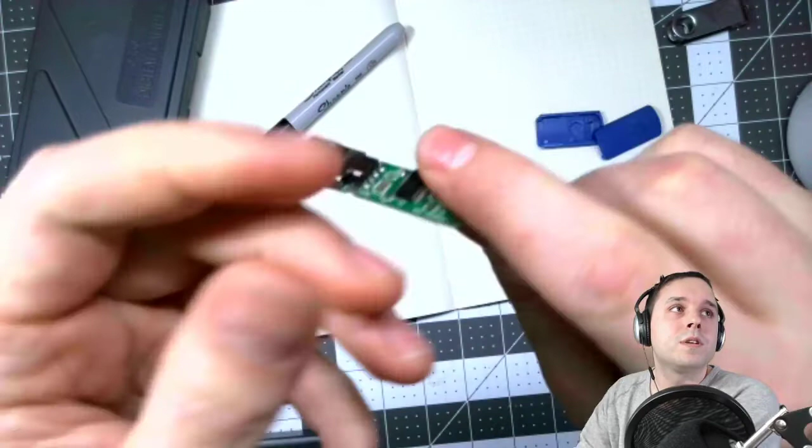Nope. Alright, let's see. Got desk. Let's see how fast I can get this done. Got my USB. We're going to crack this one open. Same old USB that y'all have previously. See if I can get that in focus at all. And what I need to do, as the police go by outside, is I need to just get a basic outline of this thing so I can start to model it.

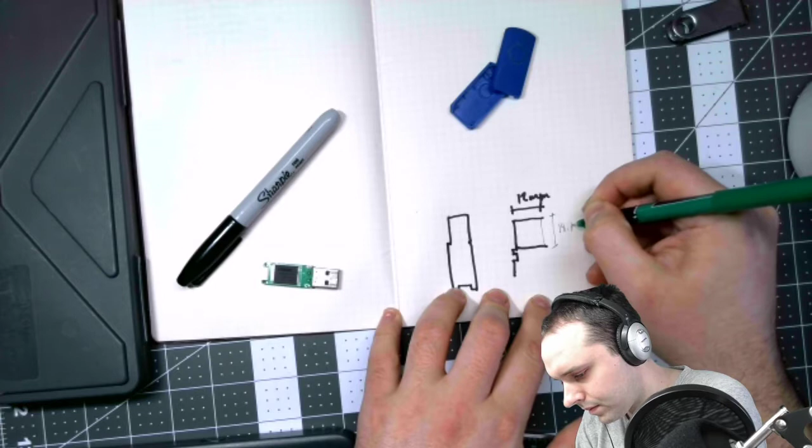And when I look at this, there's going to be a little tiny lip there. I can barely use that. I should probably mark these with Sharpie just so y'all can actually see them. Alright, just from loads of experience, that's going to be 12 millimeter. Turn this guy on, and we got 14.79, so 14.78. Or 14.8. Oops. This guy right here, I can get tiny lip is 1 millimeter.

This right here, let's assume that's 1.5. So all I'm trying to do right now is get all the critical measurements of my USB so I can take a sketch and put it into Onshape. So this dimension there, let's just assume if this was a rectangle and didn't have a little cutout on the edge of the board, 26.35. Make it 26.4.

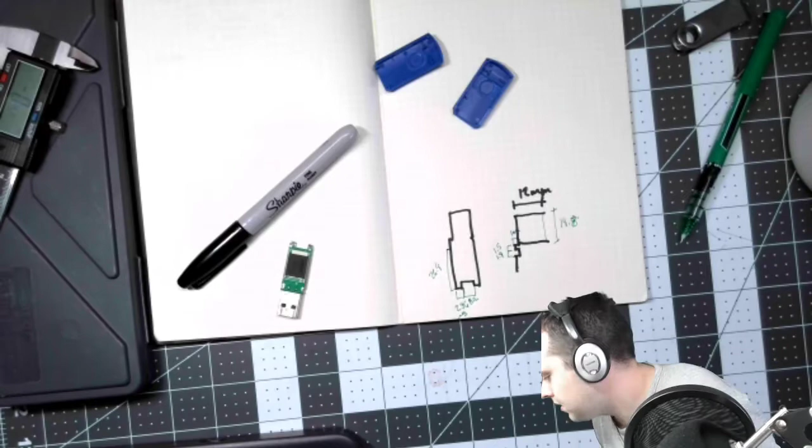2.96 for the little nubbin on the end. So let's just round up to 3 maybe. And then this gap back here is 8.2. This may be boring to some of you because you've already gotten this far through the project and done all the sketch part, but I'm just doing this because I need to do it, and it'll be nice to have on a video in the future.

So if we look at this, we'll make it nice and big now. And I don't think I can get my camera any closer. 12 millimeter, 14.9. That's going to be 1 millimeter. 1.5 millimeter.

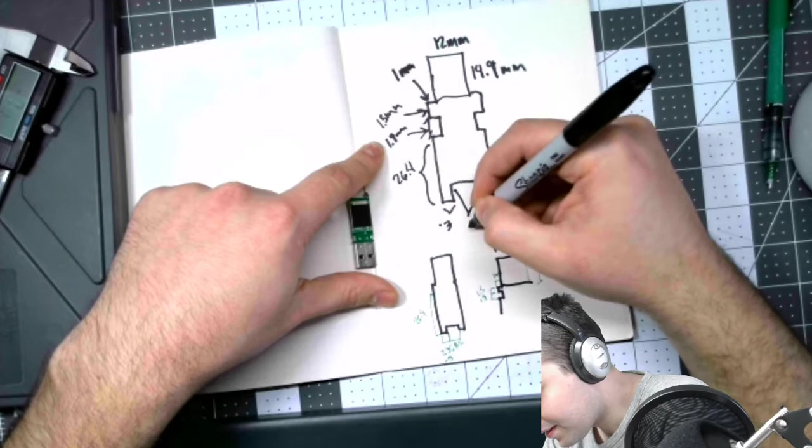Is Haiku even working still? What's it saying? I can't look at it right now. No, I'm just doing this drawing. Is it giving you like an error? Is it just giving you an error?

If I take the solder out of this connection up here, I can get more depth. I don't think you're going to be able to see that. I can get a little bit more of my notch. But let's just assume that's 0.5 millimeter depth. Okay. So, got a drawing. Hopefully this thing's actually recording. It would be a shame if it was not.

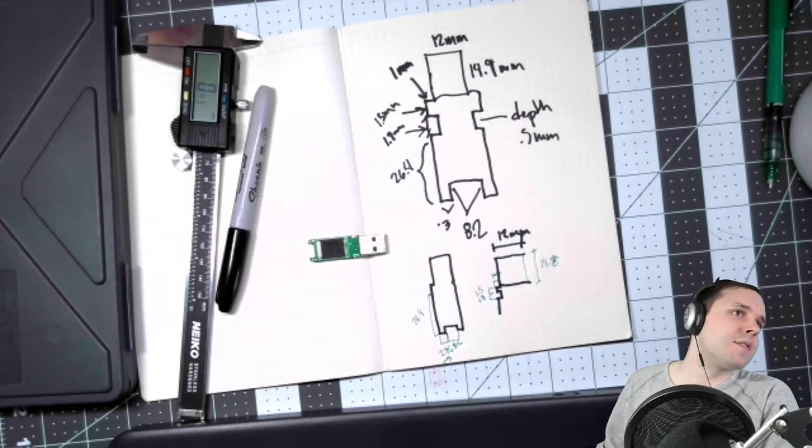So I'm using OBS. I'll bring it in actually so y'all can see it. It's what streamers use. Are you on my stream, Caesar? You should get on it.

Alright, so now what I'm gonna do, hop into Onshape. And we can start a sketch. So what I am going to do, let's start it with a construction line. Doesn't matter where we go. Hit escape. And we'll draw half of this thing. So I should just be able to do boom, boom, boom, boom. Ooh, I don't like that line.

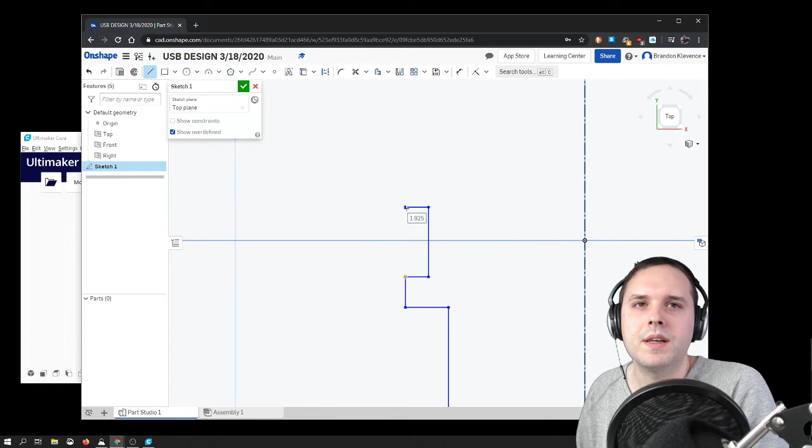That's not a line that I like either. I don't want them to intersect with anything else. This intersection's cool, this projection right here, the yellow line, but with the origin or any of the planes, no bueno. Alright, so got half of my board. It's not perfect, but it'll do for now. We can dimension it. And maybe can I add a video capture? I'll add the document camera.

What I need to do is dimension all these. Should probably get a mouse that doesn't click as much, eh? It's got that width, this depth here, this dimension. Alright. So this is going to be 6 if it lets me do it, but what's it constrained by? Ooh. Alright. Draw a new line here because I don't feel like playing with the constraints.

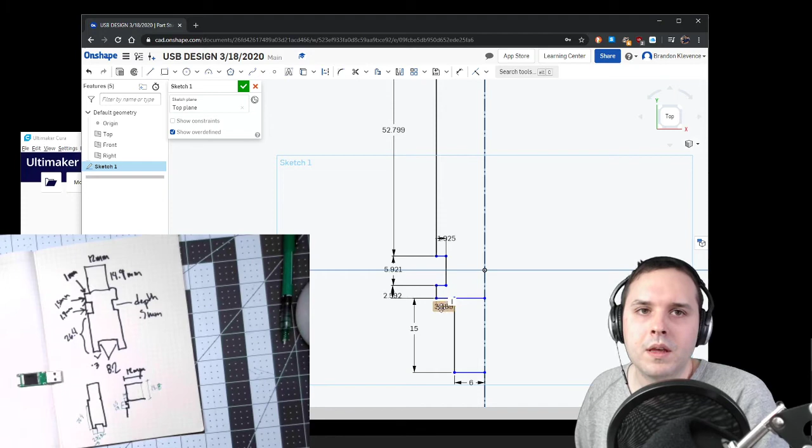Alright, so that's 6. This right here, according to my doc, is 14.9. Let's just make it 15. Let's just round up. This is going to be 1. This right here is 1.5. The notch width is 1.9. Let's just make it 2. Depth, I think I said 0.5. Yes, correct. 26.4 for that. 3? Yeah, 3 for the back notch.

Ooh, and let's just delete these and redraw. Alright, so line, enter, enter, enter. What do you not like? 0.4. That's actually kind of right, so we'll work with it. This needs to be different though. What did I say the depth was? I don't think I measured it. Three.

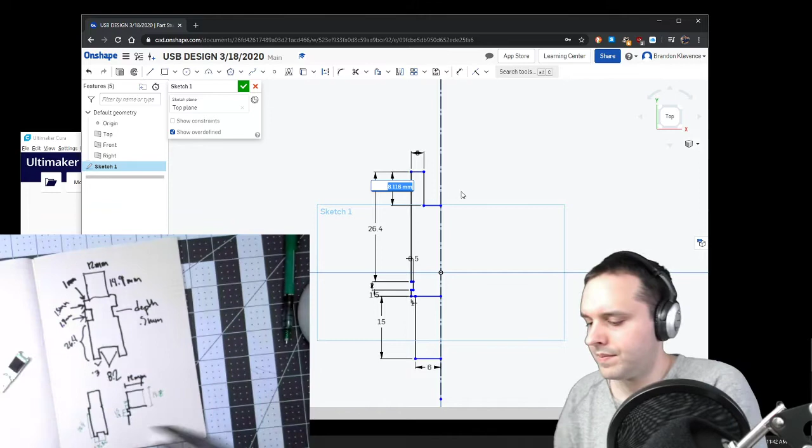Okay. So make that 3. And let's just close the sketch, take a look at it. That looks way too big. My little notch. And I don't know if you can see it that well in the stream or not. So what I'm going to do, I'm going to hop back in there. I'm going to make it a little bit smaller because I'd probably round it up. We'll make it 1.5.

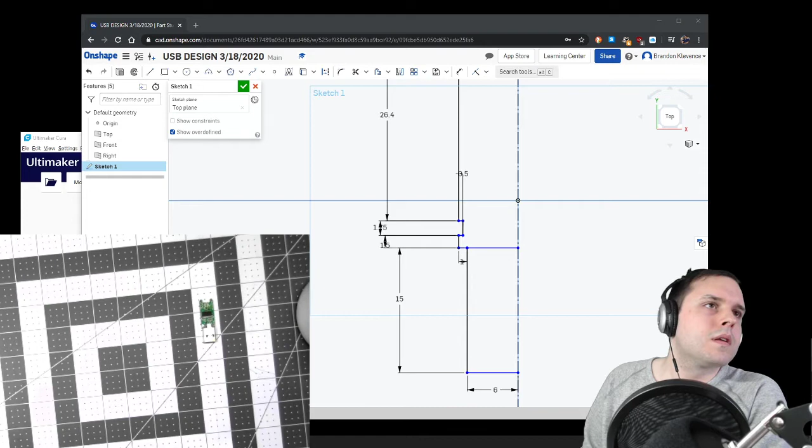All right, so I think this drawing's good. We'll leave USB here and we'll come back to this drawing later. And we can turn this off and go. No, we want that. We don't want that. There we go. Cool. All right, so got our USB, got half a USB, looks decently okay.

We have our construction line here, so we're going to use mirror. Select the mirror line, and we are going to mirror everything around. And we start getting a closed shape. Alright, so now we have something we can start thinking about extruding. I've only done that top view of the circuit board. So let's just rename the sketch. Top view USB PCB.

Now I got this. We're gonna take some guesses here. Don't really feel like measuring too much more from our USB. We'll Shift D, extrude this guy here. Don't need it to be 25. This is our circuit board port. If I remember, they're 4.5 millimeters. We'll check that in a little bit. And we'll just make that a new extrusion.

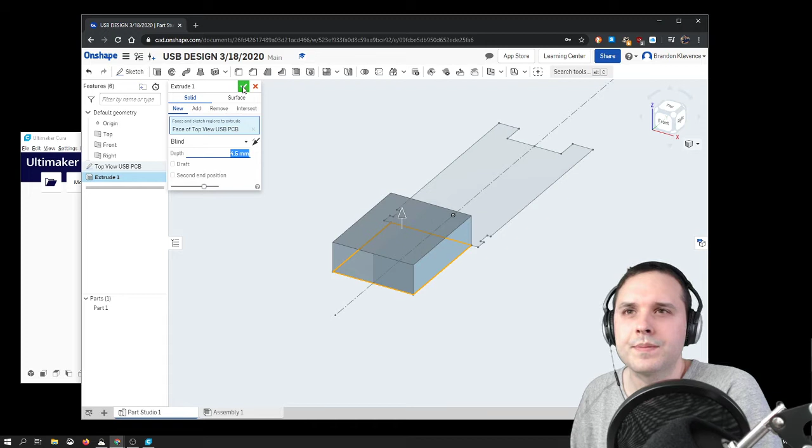Turn our sketch back on, make a second extrusion for our circuit board, and we'll make it 1.5. That's just a guess right now. That's a little too thick in real life, but it'll account for whatever's on the board. So if I turn on my desk camera again, in order for this thing to actually fit in a case, I need to transform the PCB so that it's not at the bottom of the USB port. So let's hop back into Extrude 2. Those of you that are pros, should have been an Extrude New.

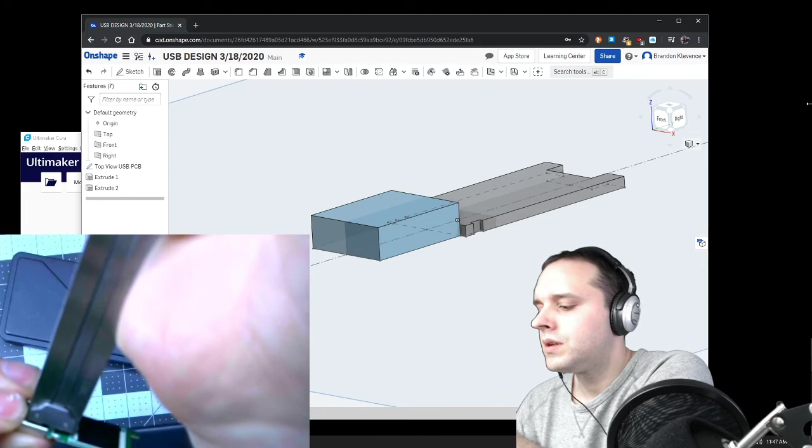And if I get my handy dandy calipers back out again, I can kind of just depth gauge one of the sides from the circuit board to the port, and that's like 1.4 millimeters. So hopping back into Onshape, we're going to use transform. And again, this is kind of boring for some of you that have already done this. Hopefully we'll get into the meat and potatoes of designing the case in a minute.

I want to transform the circuit board up, and I'm going to translate it by XYZ. That allows us to move it in one of the 3 axes. And I said 1.4, we're going to move it 1.4 up in the Z, so I can just type 1.4 here, hit the check. And then we have something roughly resembling our circuit board. It's not perfect, but it's darn close. And for this, we'll keep it kind of chunky monkey. By that, I'm not going to put any details into it.

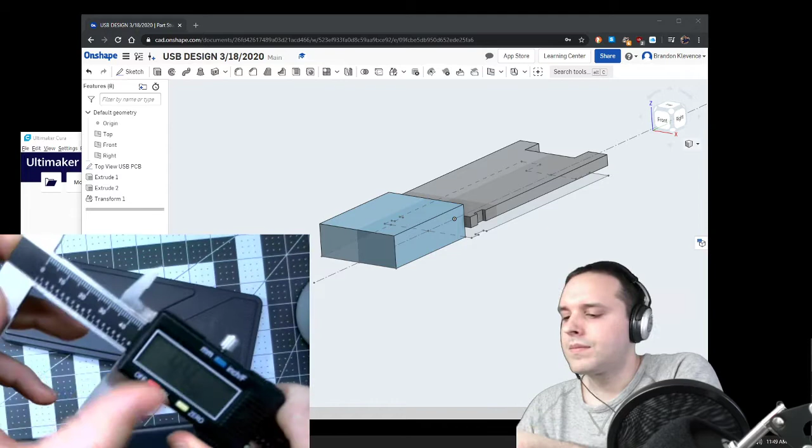What I do want to do is one last overview check. From front to back, it's about 45 millimeters, really 44.9, but who knows if I'm holding it at an angle or not. Alright, so put that away, turn this off.

I really hope this thing's recording. No, I'm doing the Twitch for a while.

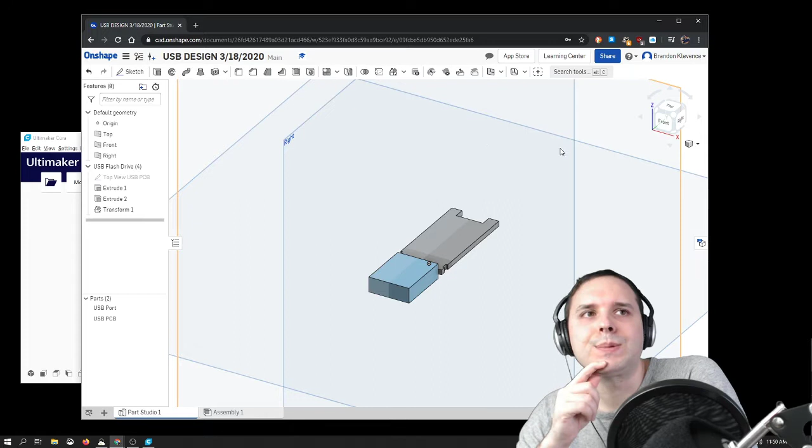So, rename this USB port, USB PCB, make a new folder, USB flash drive, we'll call it. Drop that in here. Turn off the sketch, and then we have something to design around. So what do we want to make? I think just a basic rectangle sketch, just like my examples. We'll just get that started so I can show you how to get going.

Nothing special. So we just want to make a rectangular box around this. If I wanted to sketch it out, let's hop back to desk, blue USB, PCB. Alright, so I already have this drawing in Onshape. I can work around it quite easily. Let's just go to this page here, and I will draw kind of the same thing. Not perfect, but close. And I'm going to see if I can grab another color marker real quick. I don't feel like using this green one.

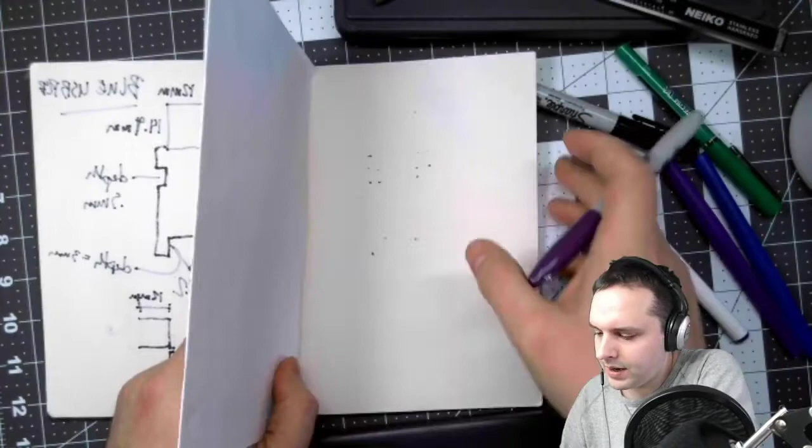Alright, I got some options. We'll see what works. So if I wanted to draw a case, and let's put something under this so I got an ink blotter. Don't want to ruin my next page. I already have this in Onshape. I just want to make a rectangular case.

The outline of my case is going to look something like this purple. I don't know if you can really tell a difference between the purple and the black. And I'm just going to make a rectangle. The biggest thing that we have to concern ourselves with is how we can fit this in a void space. So the first step for us is to use the line work that we already have from this 3D model, and we're going to use project this outline.

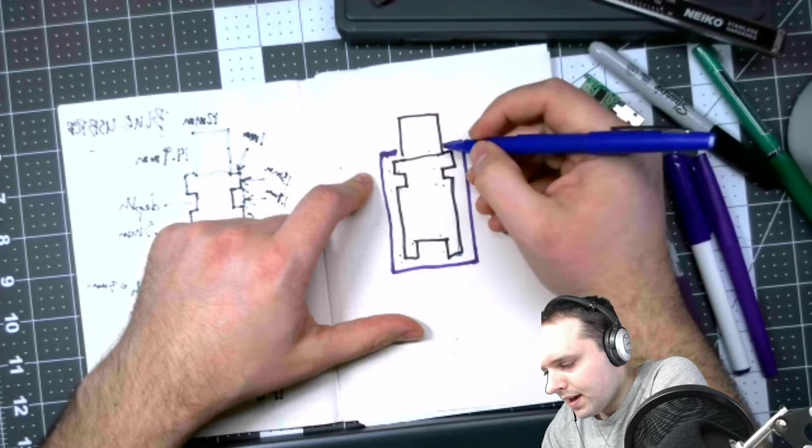After we do that, we're going to try offsetting it. So offsetting this will allow us to make an outline. So I'm going to use this thinner blue line as my outline. The purple line will come last. That could be anything. It doesn't need to be a rectangle. And the hope is if it's a connected shape, we'll end up with a solid area that looks like what I'm filling in right now. And my drawing's not the best, but it'll do.

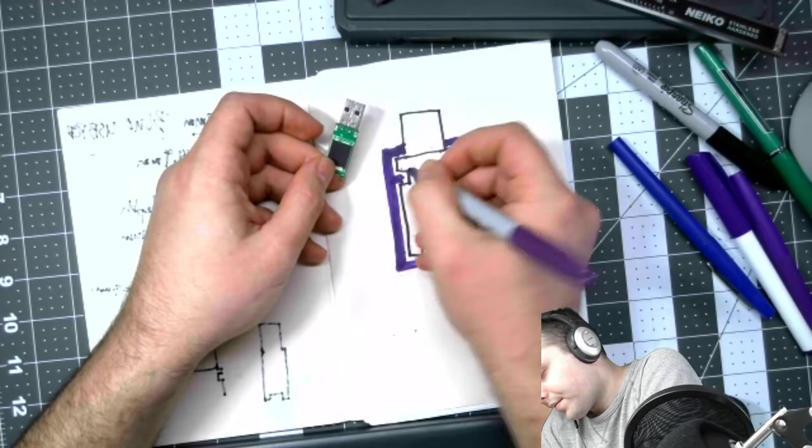Now, if this goes all the way up to the USB, this should suffice. We would be able to make a case that works just like this. What I am also going to try to do is try to put some little holders in the notches right here. I don't have too much space to work with, so that may not work out. But those little notches are going to keep us from having that circuit board rip right out of the case when we have it printed and in the case.

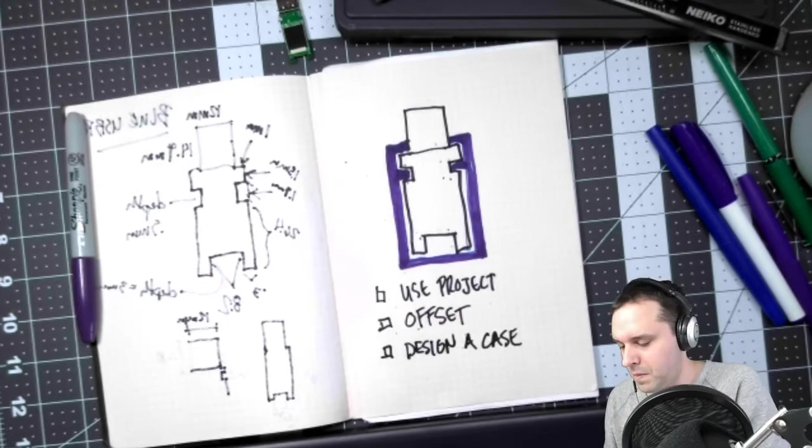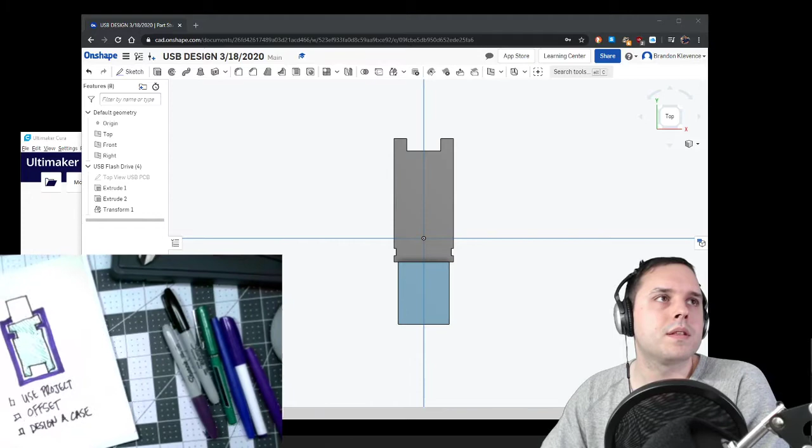So we're going to put this over here. Or maybe, actually, I will move back to CAD. And I'll try to position this so that I can actually have it kind of in view. What would in view be? That's good there. All right.

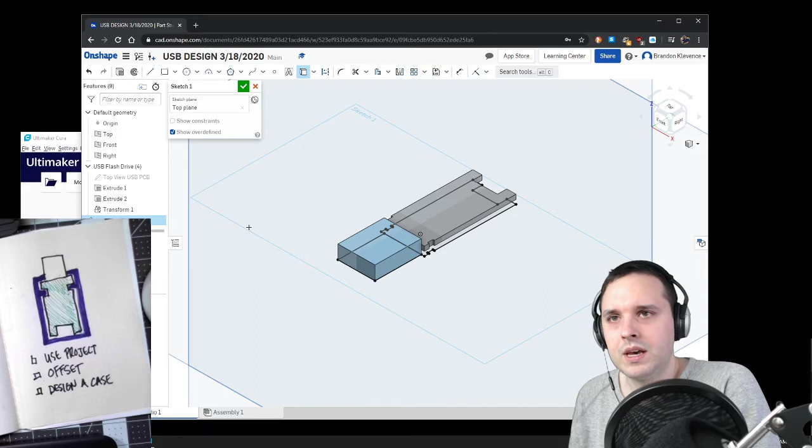Now we go to my best friend, Use/Project/Convert tool, hit U on your keyboard. I'm going to click on the circuit board, and I will click on the port. Now we kind of don't need them anymore, so I can turn them off in my parts list in the left, and we can hop back into our top view. So as I said, we have use project. We've done that. Great. We can check that off. Now we can reference our old USB parts, but we don't need them in view anymore.

And what I am going to do is I'm going to go to offset. So offset, oh, it looks like Snoopy. It's up in the top. We can click on that. And I'm not going to offset the port. There's no sense in offsetting the port because it'll give us lines we don't need. But I will start clicking around. And I could probably marquee select. Yeah, I could try it. All these lines. There we go. So it looks like I have a little error here. I think that's because I don't have this line selected. I'll click that. Perfect. We should be good to go.

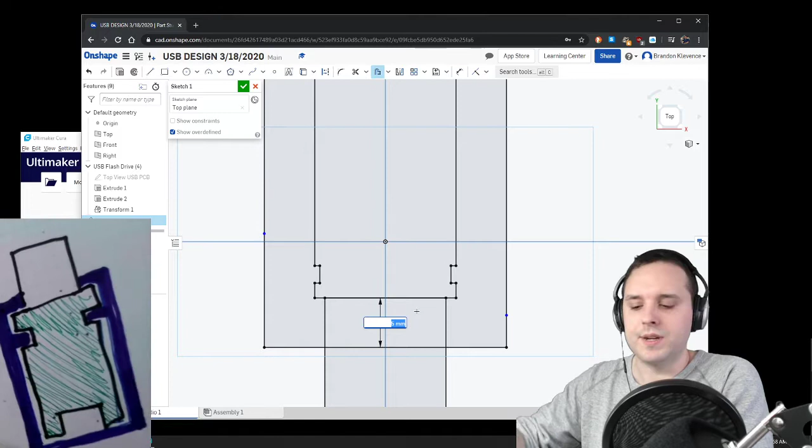So this dimension here, if I hit enter, it's 5 millimeters. In most cases that you've seen me design, this offset, so again, we're making an air gap between the circuit board and the case, this little blank space right there, making a hollow space, it's like 1 millimeter to 1.5 to 2. With my 3D printer now, we should be able to get away with 1 millimeter. Fingers crossed. And we'll keep it there.

So if I hit enter, and I exit out of my tool, the line work looks decent. There's one weird squiggle down here. We'll delete that. And then now I need to trim that away with scissors.

I should be ready to go. We've done our use project. Now we've done offset. We're quickly checking off our lists. Now we need a design a case. Now, just to make this simple for y'all, we're going to make it a rectangle.

So should I do corner rectangle? I could do a corner rectangle, why not? I'll just kind of wing it. You can do whatever you want. You can offset again as well. You could use the line tool. There are many ways you could do this.

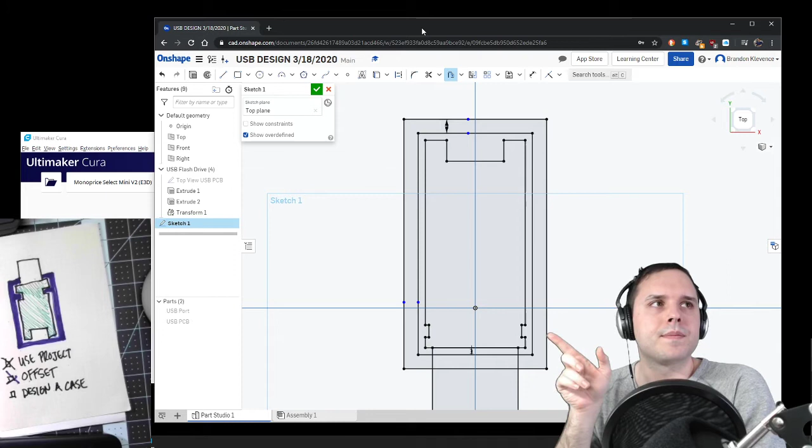And again, if we look at our sketch, we're looking at that purple space to design right now. I don't know if I can actually touch it if I bring it over a little bit closer to me. This area right here, right where my finger is, that is the purple space right now. That's our air gap right inside where I can't actually touch. That's our circuit board right in here.

So as a sketch, it looks pretty decent right now. And what I need to do, we should be able to extrude it. So if you look here, I've moused over this area, this space, and I can actually just select everything but where the circuit board port is. If it was lit up in this area as well as here at the same time, then we would have to add some additional lines and play around with it. But because this is working the way it is, I like it. Let's just extrude it.

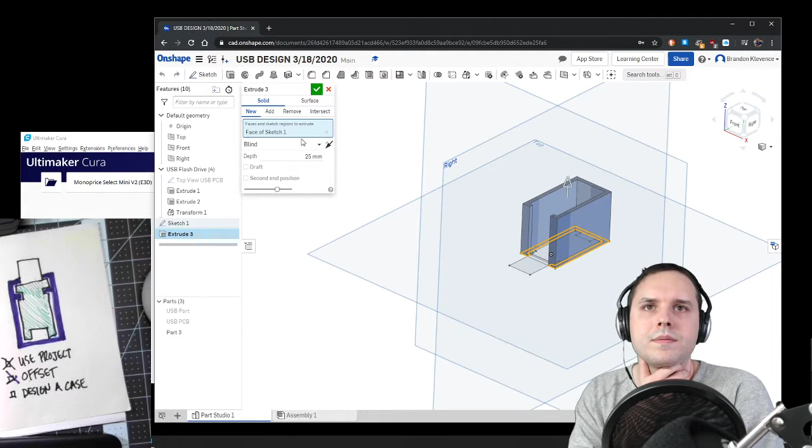And I should be able to extrude it. Let's just do 2.5 millimeters for now. I probably want it to be more. Let's take a look. And I'm going to turn off some of my planes because I don't really need them anymore. Okay, hit the check. I think that's going to be decent for half the case. I could make it a little bit bigger. Let's just go all the way. 4.5 would be all the way. No, really?

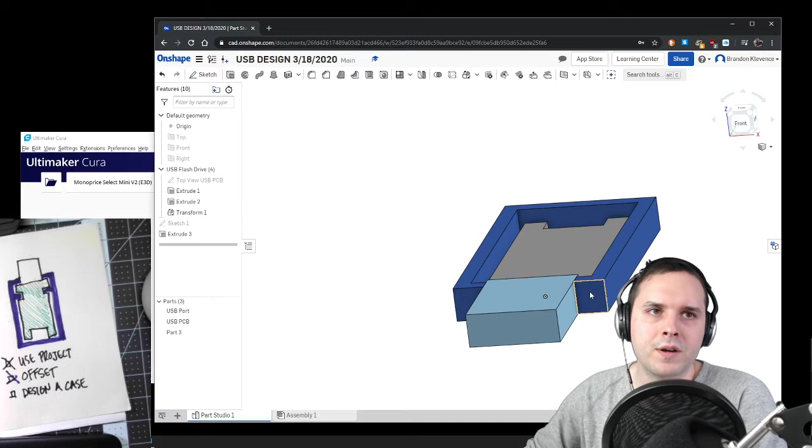Let's check on that USB port. What is it here? 4.5? Yeah. Extrude here. Oh, 3.5. Doi. There we go. Now at some point I probably want to make that a little bit bigger so it goes over the port. Yeah, if it's like 4.6 maybe. Yeah, this all looks good. So we can close that. We can turn these off. Let's turn that sketch off for now.

Now we're going to start with the bottom and then we'll work our way to the top. I'm going to simplify this so that our top piece is literally just a rectangle that we glue over top. It's not going to be a hollow piece. Again, keeping it simple. Let's rename this case bottom wall. And we know it's an extrude. I don't have to put extrude in there because that's the little icon for extrude.

I'm going to turn sketch 1 back on to reference it again. And I'm going to make a new extrusion. We're going to make it an extrude add. And I'm just going to select all of sketch 1. And we're going to flip it in the opposite direction. The merge scope, we're going to have it merge with our case bottom wall. But in selecting everything, one issue we run into is it's also selecting the USB port, which I do not like.

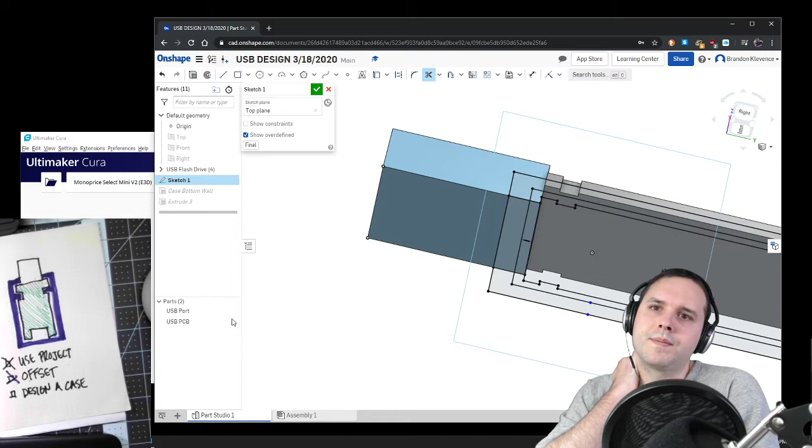Now, a quick way to probably fix this without undoing a ton of stuff is I can just use the scissors and trim away this use project line. So just so y'all can see that, this was sketch 1, and I can trim away these lines so we're not referencing the USB port anymore. I'm going to delete these points. So we'll save out of sketch 1. Alright, now I have that hollow, which I also don't like.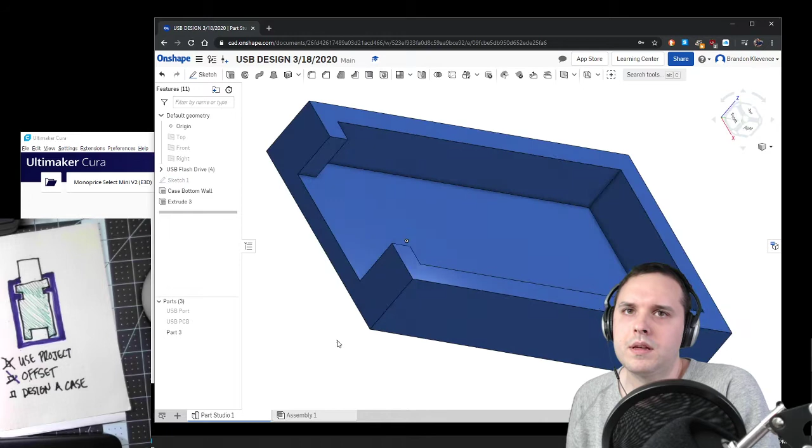So if we go back into extrude 3, let's select these inner areas of the sketch. And let's select this last little piece right here. Oh. There we go. And let's make the depth of this, we could probably get away with 1.5. Again, this is going to be the bottom of the case. I'm not looking at my parameters for how thick walls could be on my printer or with Cura. We'll check it in Cura in a couple minutes. If I hit check and turn off sketch 1, we now have a working part for our case.

So turn off sketch 1 again, turn on our circuit board. We have this ready to go. Now, what's great, I could just be done with this. I could also edit my sketch 1 so that the outer line here is something different, a different type of design. I can add as much complexity as I want. For us right now, I'm not going to do that.

Let me take a sip of coffee, a little coffee break. Okay.

So we have part 3 right here. I'm gonna rename part 3 to case bottom, just simple. And we will rename extrude 1 or whatever it was, extrude 3. We'll call it case bottom. We could call it cap, but that might get confusing. We could... wall. We'll call it wall.

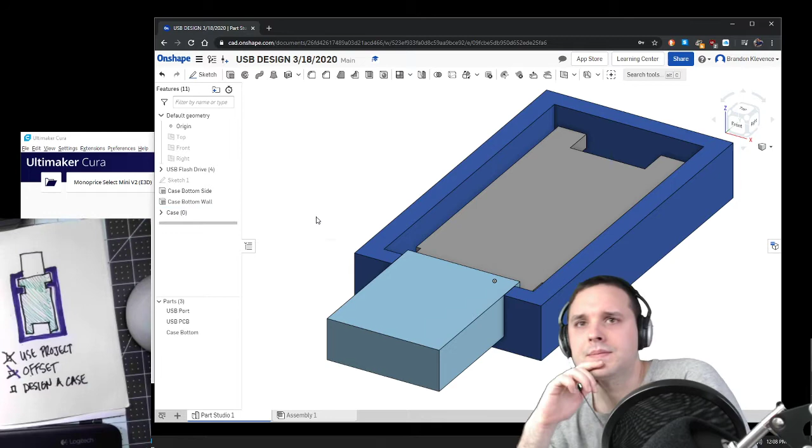And then let's rename the top one to side. I think that kind of makes sense for right now. Let's also make a folder called case. And we'll just move everything in there, if it lets me. All right, cool. So now that we have this, we're gonna make our top. We're gonna make the cap that goes over this.

Let's just edit this really, really quick and make it 4.6. I think it'll just give us enough on the 3D printer space if this USB port is bigger than I actually measured, or if the printer tolerance is off a little bit, so this part's bigger than I've designed in Onshape.

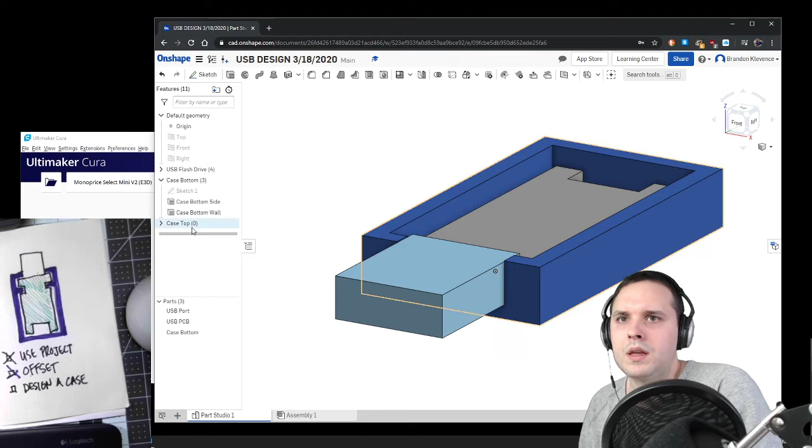Alright, top of the case. Let's just call this case bottom, new folder case top, and inside that we can make a new sketch. New sketch I'm going to make on the top of the case bottom part. So I just clicked again on this outline here. I'm going to turn off USB port and USB PCB, so we're only working with the case right now. And my favorite tool is use project. We're going to click on this outline.

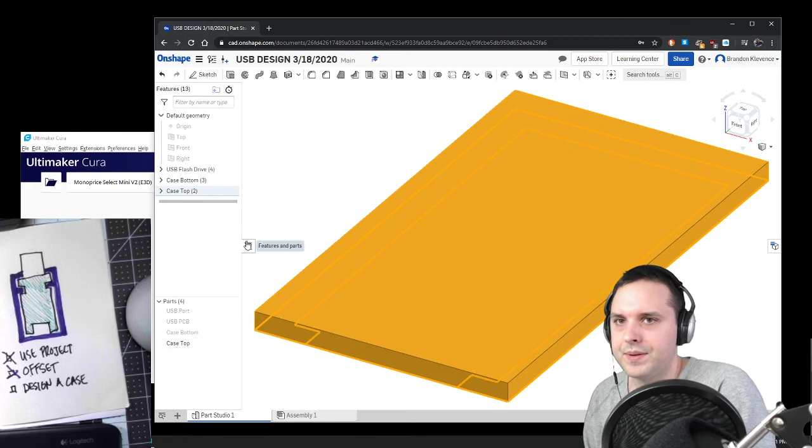And I will rename it to case top. Again, we know what's going on based on the icons next to everything. The little squares and extrude, the pencils, the sketch. And then down here, I can rename this part 4 to case top. And we pretty much have a case right now. I mean, we got a top, we got a bottom, we got a USB port and our USB PCB.

Let's turn off the top. And we can edit appearances. So I got a gray port. And then I have a green PCB. Now, for most projects, we still want to have something in here to hold the PCB in place. And I have these really tiny notches. I don't know if it's going to focus on it. If I make this full screen, maybe I can...

What I need to do, if I wanted to, and I may not do it this time, is design something to kind of pinch against this notch right here. In some circuit boards, and even on this one, I could use a set of clips, and I could snip the clip out. Sometimes they have solder in them. I could desolder them. That's the case on either side here. One side I would snip, one I would desolder.

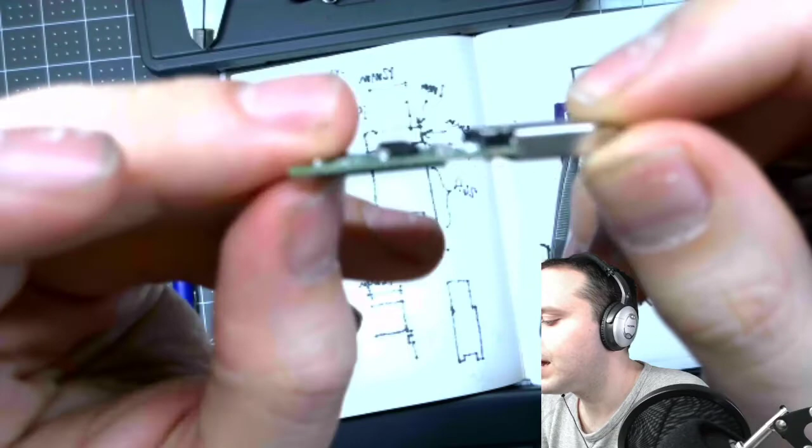But I think for this, I'll try to add a little tiny thing in there. I don't know if it's going to work. The little tiny thing that I'll add, if we head back to CAD here, basically right here in my case. I want something just to rest in there, just barely.

Now, one way I could do that, I'm going to go back into case bottom. And we're going to turn off the ports. We'll leave the PCB on for a minute. I'm going to make a sketch, and I'm going to make it on the inside of my case. Now, I don't know if any of this is going to work. I am going to use project the PCB onto that sketch. So if we turn off the PCB part, now I can see that outline.

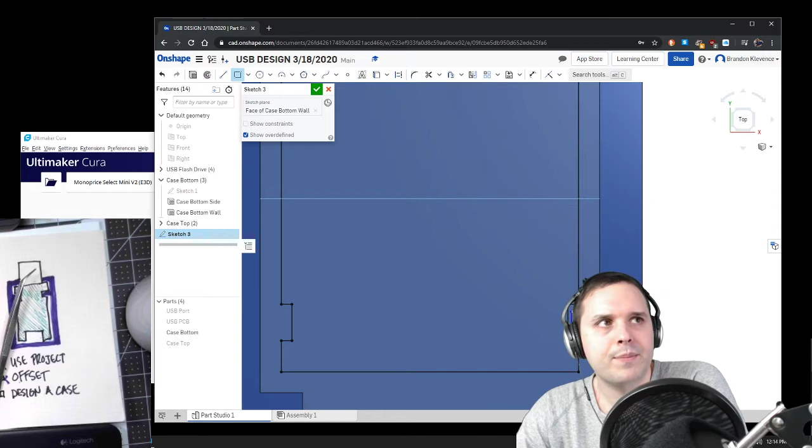And now that I have this notch in the sketch, I can try to design something, anything, that mates with that notch. So I'm just going to use the line tool. I could use the rectangle tool as well. Why not? A little simpler. Now that notch is about 0.5 millimeters. None of this is going to be perfect, but I need that wall to at least be from top to bottom here, and my face is blocking it. 1 millimeter from here to here, just for that wall to print, and we'll check that in Cura in a minute. So again, I'm designing around this notch.

Now if I use the line tool, make a construction line, here's my midpoint right here. I should be able to mirror this right on over. And it's really hard to see, but now I have a little area there that I can extrude. And let's turn off the sketch, because you don't need to see the sketch anymore right now. So I can do an extrusion of this rectangle and this rectangle. Again, they're on that base of the case bottom. If I want to extrude all the way to the top, I think I made that 4.5, or roughly the height of the USB port.

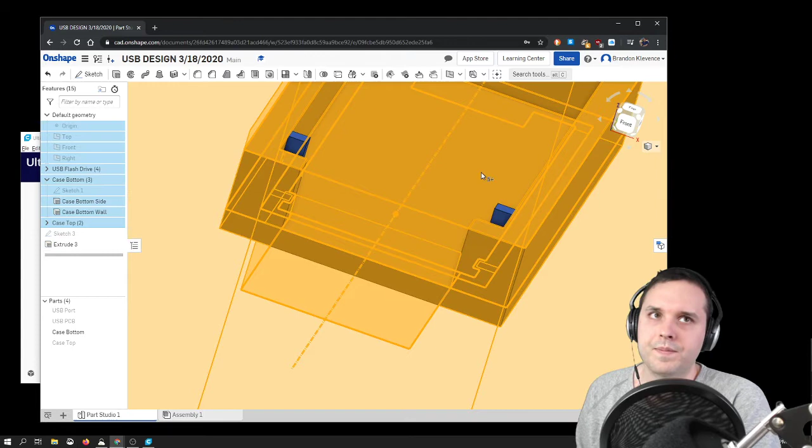And right now it's an extrude add, which is what we want. The merge scope is the case bottom. So I should be able to hit the check. And just to clean these up, whoa. Let's deselect everything. Let's add this into case bottom folder. And I don't know exactly what to call these, but we'll call them like notch holders. Call them pinchers, I don't know. Let's just hit enter. Okay, so, oh, did I do that right? Yeah. Extrude out. That's good.

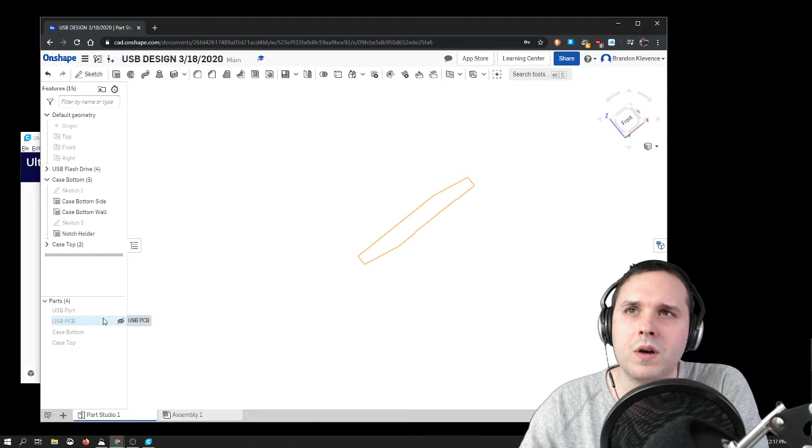Now, in real life and in the project itself, we did a couple extra steps to make sure this was right. Before even going anywhere with designing a case, we were checking to make sure this was the right size. And we did that by printing it out. The same thing goes for case bottom here. What I am going to do, hopefully it actually works, is I am going to create a drawing of the PCB. I'll make it 4-view. It is a regular size sheet of paper, millimeters.

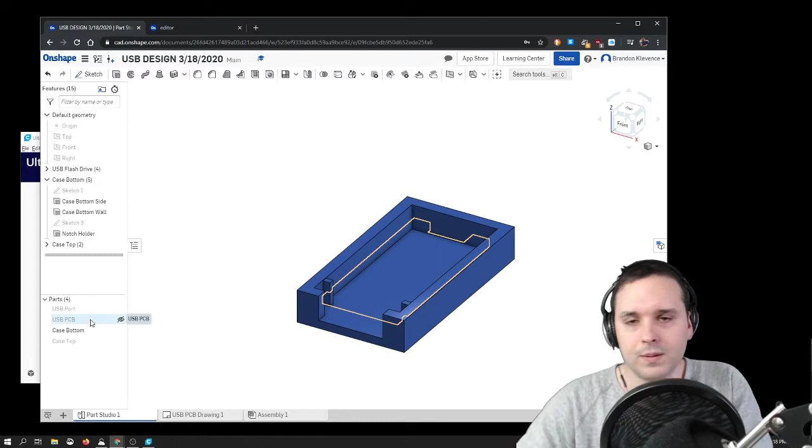So I need to make a drawing of case bottom, create drawing of case bottom, 4 views, hit OK. And I am just going to hit print on this too. And we'll see what we get. Ooh, pop-up blocked. Always allow. Take 2. Alright, got a second print. I'll be right back.

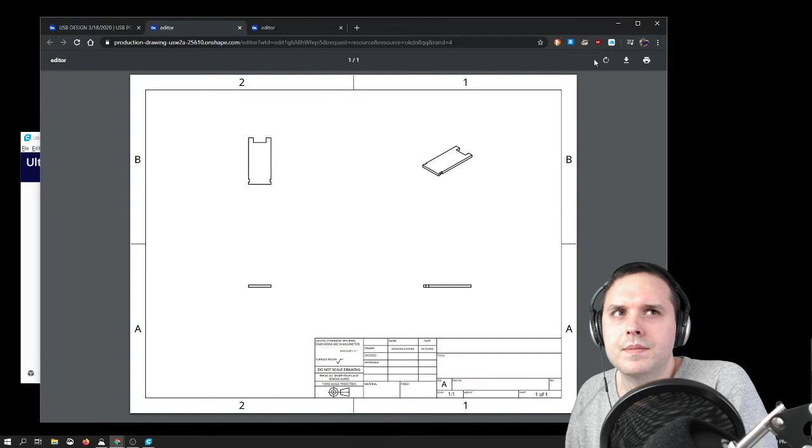Alright, so for the PCB, I messed up one step. Let's turn on desk. I forgot to actually make it 1:1, so it's way bigger than it actually is, probably 2:1. So we hop back in CAD, USB PCB drawing. I should have noticed that on the screen, but this whole streaming thing's new to me. But 1:1, hit check. All right, that's good. Let's just hit refresh. And print again. Now while we let that print, let us take a look at the desk again.

Hilarious. Twitch is hilarious.

And now I'm going to grab that. All right, now we're cooking.

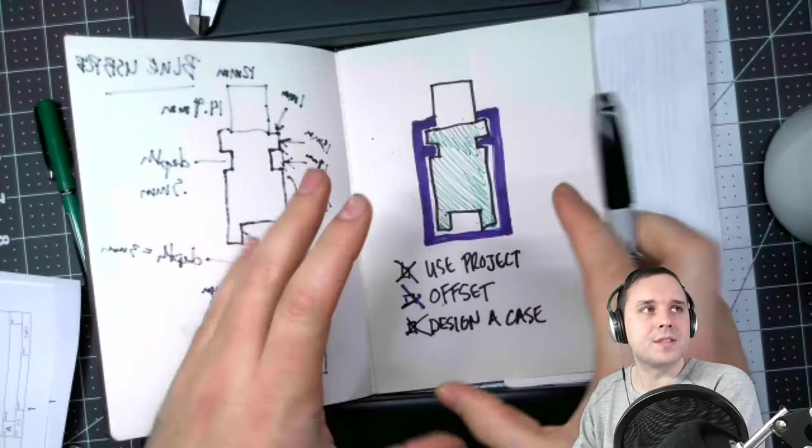Alright, so checklists. We've designed a case. So we used use project, used offset, we've designed a case. Now hopefully all this is recording, so all of this stuff I'll be able to post to YouTube or something like that at some point, so you see every single step that we took in Onshape.

Clean up the desk a little bit. We don't need this drawing because it's wrong. Now, this is the circuit board. Whoa, I'm way off. I wonder what I got wrong there. It looks like in the front I'm good, but I definitely need to extend my two little tines back here by quite a bit. That's at least like 2 or 3 millimeters.

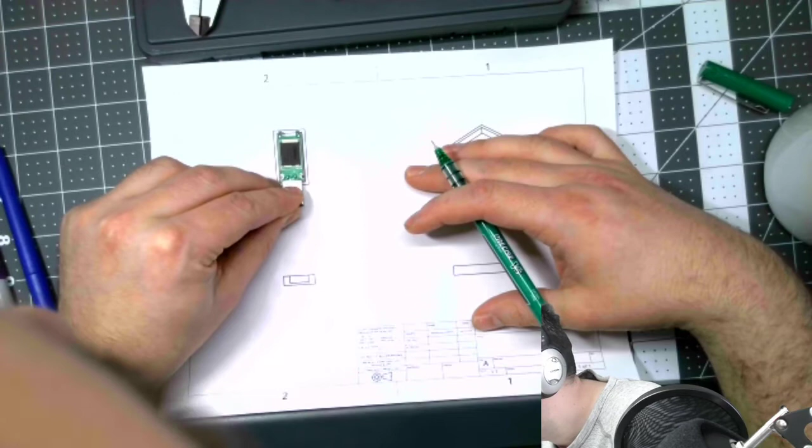Let's look at the case. I mean, I could just make the case bigger. That's the beauty of all this. I don't have to go back to the circuit board. But that looks like it should work. I just need to make this wall a little bit farther out. I did use project, so it's going to make sense just to go back to the circuit board sketch and change that.

So I got my digital calipers. Let's turn them on, zero them out. I need a distance from here. And it could have been I was measuring on an angle or something like that. 26.4. What did I say in my notes? 26.4. Weird. Alright, let's hop back into Onshape.

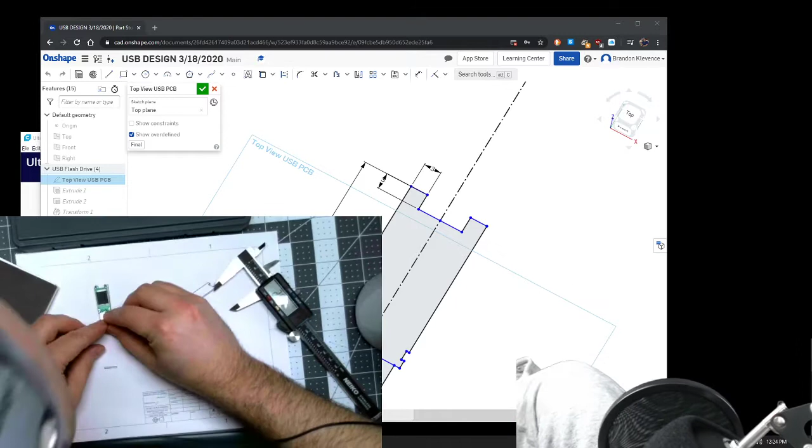So USB flash drive, I can go back into my top view, 26.4. Whoa. What am I measuring wrong? Let's see. 26. Because that's like... I really wonder why it's so shrunk. Did I get my...

That's sheet properties 1:1. Oh, you know what? It definitely got messed up on the printer. Alright, let's go print again. I feel like that's the problem. How can I do more settings? Quality, scale, I want it to do default, or can I do custom? Let's just try again. We'll see what we get. Because maybe it scaled it just a tiny bit.

Alright, another piece of paper. I'll be right back. This is more like it. Okay. So that's pretty much spot on.

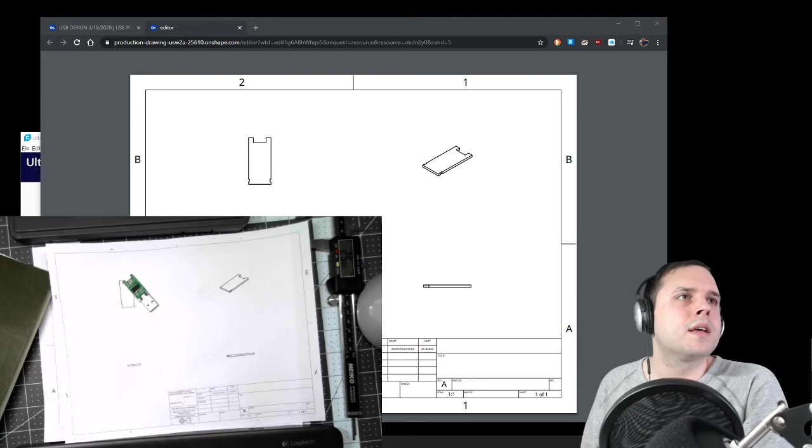Let me get my headphones back on. I don't think I can zoom in at all with this camera. I can try. No. I can just make it bigger for y'all to see, because I don't have too much more space or arm length for this camera. But if we look at it from above, that looks pretty much about right. I don't see that any better. I could make the drawing a little bit bigger, the circuit board a little bit bigger, but I'm gonna deal with it.

So if I go back into the CAD, and you can turn off my document camera, I should double check this drawing one more time, actually. Make sure that I'm printing it 100%, because the last thing I want to do is print this and waste some material and wonder what was going on, and it just be I forgot to do a second check. Alright, so I'm gonna hit print.

Crumple that paper. I should warm up my coffee.

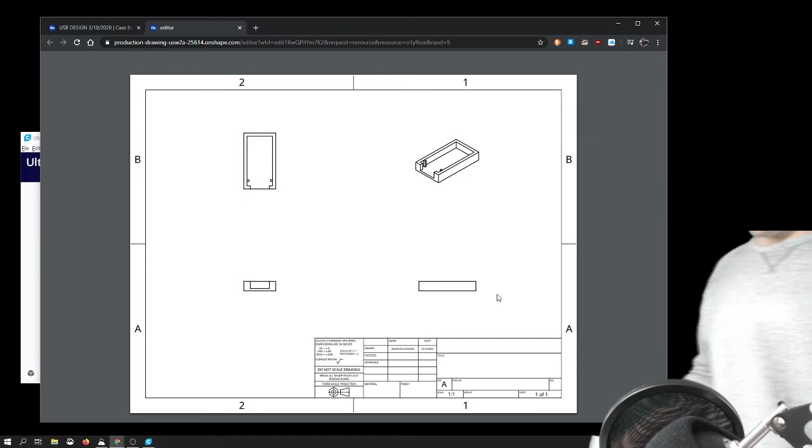Flip back to the desk. Alright, new printout here. Plenty of space. Now, I don't think my little notches, the little rectangle there and there, are actually going to do anything for me. But we'll see. And another thing that I didn't really deal with at all, we'll also see what happens, is how much USB port I have exposed. I always forget what the actual depth is.

It says it on Wikipedia. That looks about right, and we can match it up with a little adapter that I have right here and see if we're good. Yeah, it looks like we're gonna be fine. Cool. So that gets a check.

Now what we are going to do, so I've made a drawing of my top view. I'm just gonna put some basic dimensions on it. That's in inches though. I don't like that. I forgot to switch to millimeters. So if I hit dimension of this, that's good. I just want to get a length, a width, and then we'll do a basic height here.

And if I wanted to get a little detailed, I could say like, hey, that's 4.6 and that's 12. So basic kind of stock USB dimensions. If I also wanted to get fancy, I should be able to do show shaded view, and whatever color I have will show up there. I only have white filament. I do have some other colors, but we'll deal with that.

So I have a drawing in my case bottom. Head back into Part Studio, close this sketch, and let's create a drawing of case top. This is what you would essentially be handing in on Haiku at the end of the week. These two drawings, just so that we could print them out exactly like I just did and get them going. I'm going to flip this back to CAD.

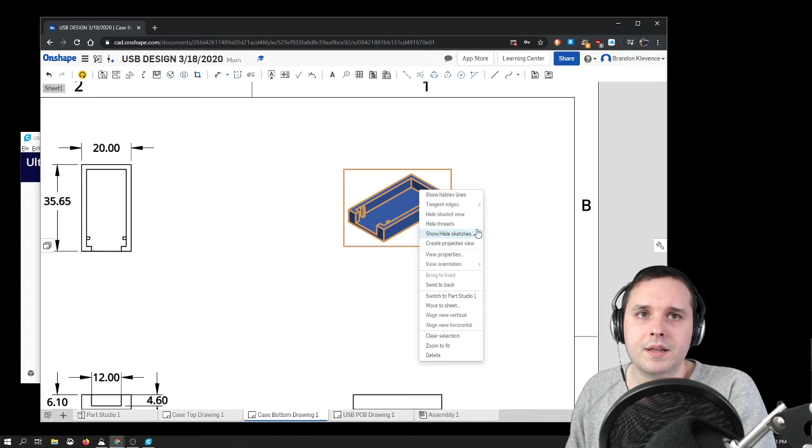So for case bottom drawing, I just dimension a couple things. Hit the dimensions up here. Dimension length, width. Up here. Did some extra drawings. Show shaded view on this guy right here. Where is it? Right there. Made it blue. But again, I only have white, so it doesn't really matter.

This is the top. It's literally just a rectangle. Doesn't matter all too much, but if we were to dimension it, length, width, and height. It's also interesting on the isometric view up here. I should also be able to dimension this, but that's wrong. I forget how to do dimensions on that. I'm not going to concern myself with it right now, because that's foreshortened. We don't want to deal with that.

So these two drawings, we can export them. You can export them as a PDF. You can hand them in. Just make sure your name's on them. If we go back to Part Studio 1, we can call this case one glue, because I would glue it together probably when I'm done. Flip back into isometric. I got everything I need.

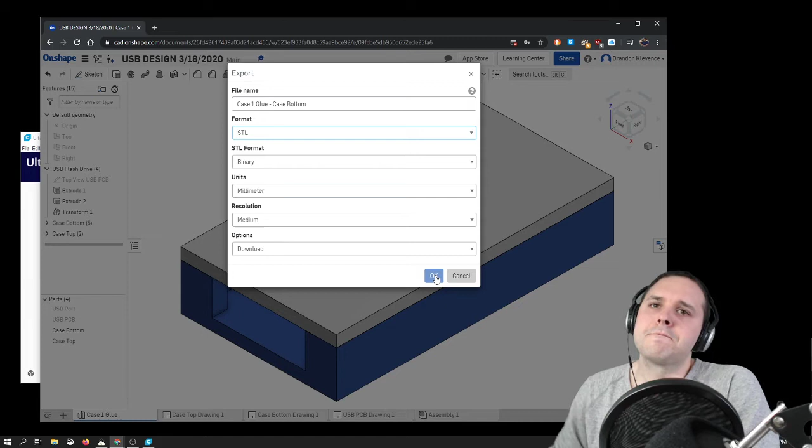Now I can hit export on the case bottom. And I have it as STL, I have it as millimeter, resolution medium's fine, and I'm just downloading this. If I hit OK, it's going to download the case bottom as an STL, and then I'm going to hit export again, do the same thing with the top.

Now what I want to do, and I should set it up in a second. This is my 3D printer. I'm not going to move the camera too much, but maybe I should put some tape on the table. This is what the printer kind of sort of looks like. Alright. Flip it on, and my printer is different from the ones at school. It's much smaller. It's pretty decent though.

I'm gonna set it to preheat. You can barely see it right now, but I'm just gonna set it so that our print starts up a little faster. And then let's try and move this guy back here. Let's see what we get. That's a decent view. So hopping back to our CAD, I exported those STLs. That's something you would hand in to me on Haiku.

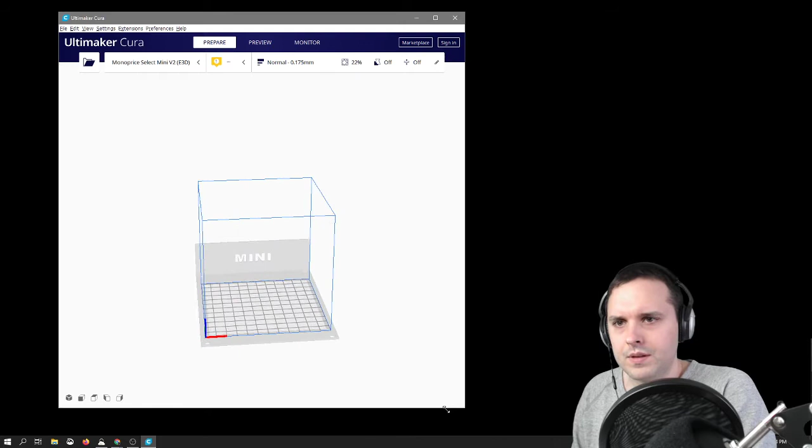And my printer's just going to start up. I should probably turn down some of my audio. I think it's just going to kind of be that way, unfortunately.

I'm going to go to my downloads. I have my two STLs. My version of Cura is a little bit different. It's not made for Lulzbot. It's not green, doesn't have the Rocktopus or anything like that going on. This is like Cura, the original version of Cura for Ultimaker, so it's very blue and just looks the way you see it right here. This is a representation of my print bed you saw a second ago, and the parts are just kind of automatically laid out in here.

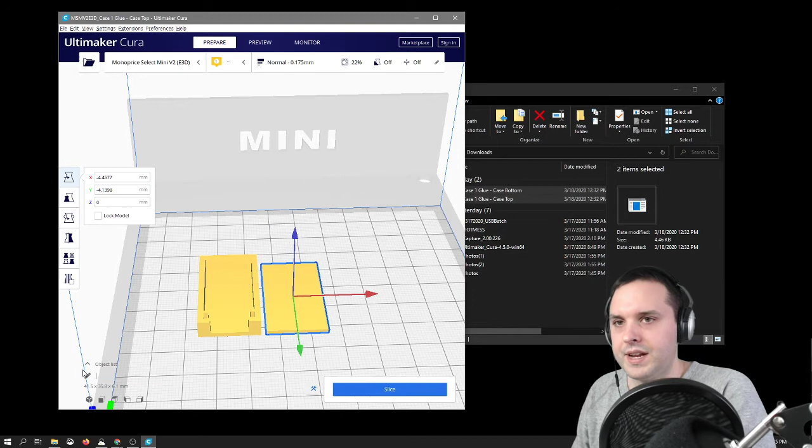What I will do, I'll move them a little bit closer together. It's not going to affect the print time all that much. And I'm going to rename this Clev USB Twitch 03/18/2020. And if we hit the good old slice here, yeah, all the settings are pretty much the same. Let's just make sure I don't have any post-processing in. Yeah, let's delete this. This is to pause the printer. We would get a failed print if that was still on. I paused it previously to add the magnets and such in. We're not doing it at this time.

You know what? Let's play around with the settings a little bit. Because it just looks way cooler, instead of lines, let's do concentric. It just looks much higher quality. And then let's slice it. 32 minutes, that's not bad.

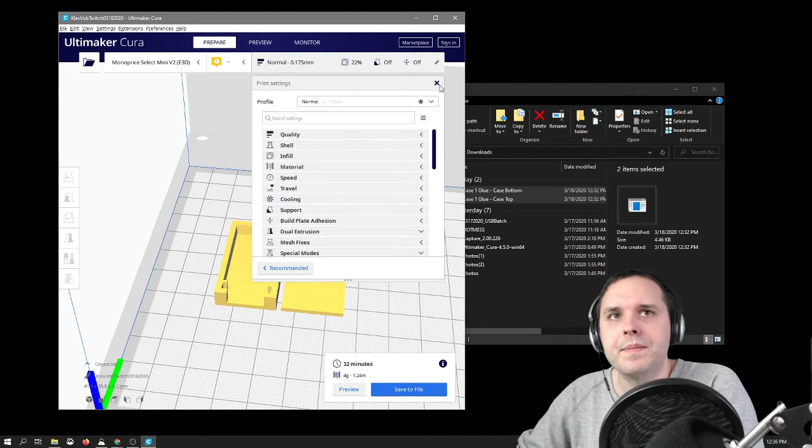So what I need to grab, I have an SD card that's attached to my printer. I'm going to grab that, make my way over to the other side of the PC. And I have my handy dandy SD card reader. Plug that on in. Take a sip of coffee while it boots up.

Ooh, Steam notification. You can't see it though because I'm blocking it. Thank goodness. I should turn that off.

If I go to save to removable here, it's going to save that to the SD card. I have some other files in here. Let's just put that back. I need to rename this flower pot, because there's one that's named similar to it in there. All right. So I have my G-code file. Again, Cura takes our STLs, it slices it up, and then we can export as a G-code.

One thing I should check before I actually get this thing on my printer: on Cura for LulzBot, there's a little drop down up here. It says layer view, I believe. Excuse me. I have a preview, and basically this is going to give me a preview of what my print looks like. I can hit play. It's telling me what's going on this top layer here.

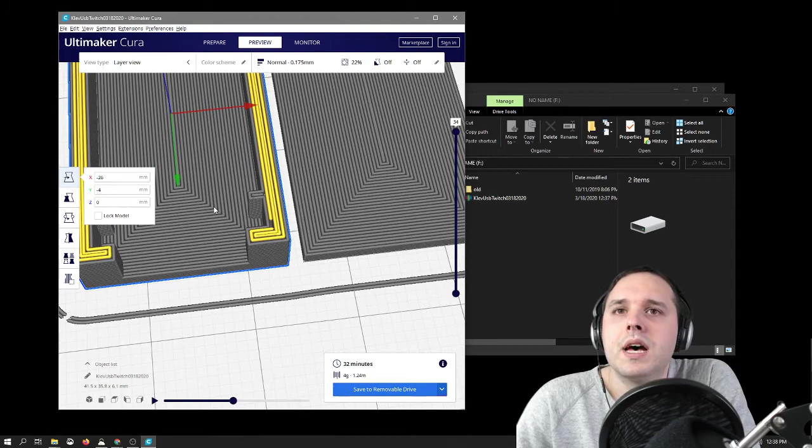I don't really care. What I do want to look at, and what I'm going to zoom in on if it lets me, are my little notches, because they're the smallest feature on my print. And it looks like they're actually printing, so we're good to go with that. And I've saved it. Let's just do eject.

And I have, again, a little SD card extender, so I can plug in the SD card on my printer. We're already preheating the printer, so hopefully it'll be faster to start printing. And I'm going to go to print here, find my G-code file, and then we'll cross our fingers and see how well this turns out now.

Now my hope again is that this is all recording. If this isn't recording and I can't hack it up, I'll just have to do it again, but I feel like it's saving somewhere. I hope it's saving somewhere. I think this is it right here. I hope at the end when I hit stop that it's one of these right here. No, that's not it. I think it's somewhere else. But YouTube was not working earlier.

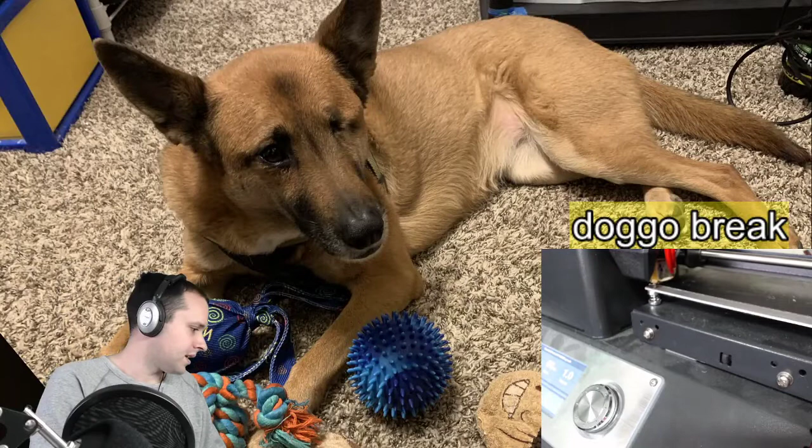All right. So now we're just kind of chilling. I may go warm up my coffee real quick. My printer's warming up. My dog's not here. I may grab my dog real quick and just have her say hi. So I will be right back. I don't know why desk camera's not working. I'm very curious. Doggo break. Is desk working? Yeah, it stopped working. Weird. Don't need it anymore, so it doesn't matter. Alright. So the printer's getting set up. I will be back in just a sec.

See how we're doing, how messed up this thing might be. Oh, we're actually doing pretty good. Okay, cool. Throw out my headphones. We're doing that first layer. It's really hard for you to see, I think. I'm gonna make it bigger and see. The first layer on my printer, it almost looks transparent. So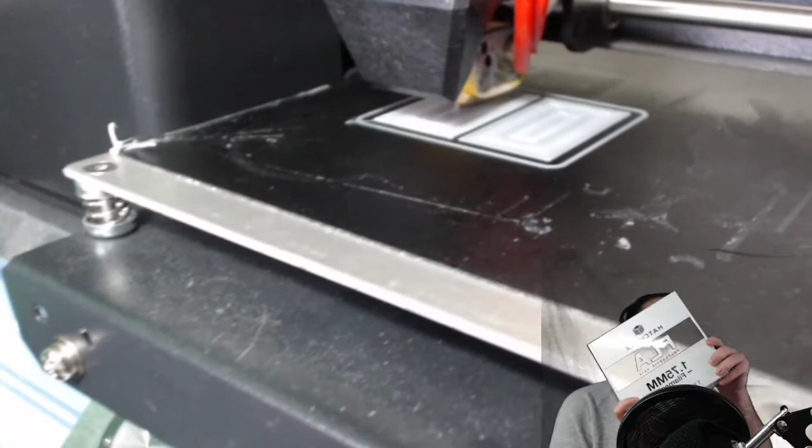I did buy some new white PLA, and I just got in some super cool other varieties. I'm not going to grab it because it's still in the box. I need to tweet about it actually. I got something called polypropylene, which will allow me to do living hinges. So the best way to describe what that will maybe allow me to do is if I printed something like this case. This case is injection molded, not printed. A living hinge is what allows it to open and close. So with the polypropylene on the printer, I might be able to do that.

I also bought some flexible filament. They're both by Fiberlogy, I believe. And I'll be able to maybe print some smaller flexible parts with that. So we'll see what that looks like when I get there. What would be interesting, and I can kind of bring it back to the CAD maybe, is I could design a case like this, right? Where this top piece and this bottom piece are actually connected to each other and then they fold together with the polypropylene. Will I get to it? Maybe sometime soon, but at least right now I just want you to understand how to go through this process.

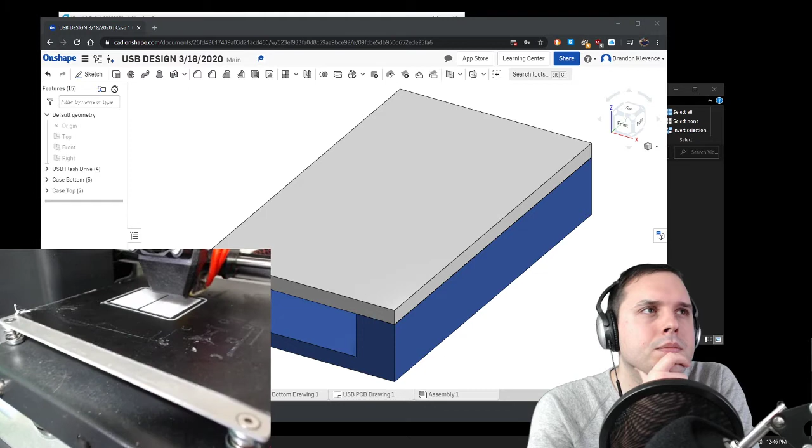For those of you that weren't here a little bit earlier, I modeled my circuit board. So I measured it and made my sketch. I made my extrudes, and then I transformed the circuit board so it was in the right-ish position. The biggest piece of the puzzle, which most folks have, is I needed to project the PCB onto a new sketch. So this outline right here.

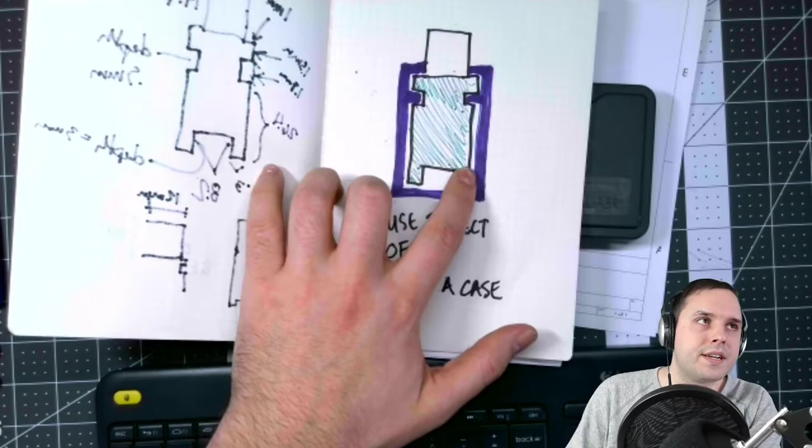And if we flip to desk mode, I made a quick drawing here. There were a couple steps that we went through. The first step was use project, which we already talked about. After use project, we did offset. Now, offset is so that we can start this air gap, this non-purple area between the green and the purple that's clear. What that looks like in the CAD, it's this little area right here.

Now, all I did was I offset using little Snoopy guy up here. I offset these lines and cleaned it up using the scissors. And then in order to actually make the case itself, I needed to make an outer line to start this purple area right here. So in the actual CAD, I made another offset. The first offset was 1 millimeter, and then the second offset for the outer line of the case was 2.

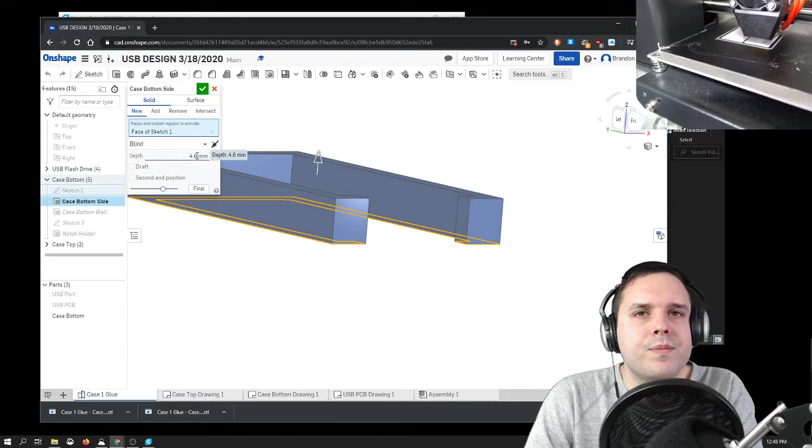Once I did that, just because I'm wasting time while this thing prints, I started an extrude. If it decides to load, oh, I need to turn on case bottom. I initially extruded just the sidewalls. I extruded it to 4.6 just so it's a little bit taller than the actual USB port. And then after that, I extruded a wall on the bottom of those sidewalls to give it a bottom facing cap. And I think y'all can kind of see that here. Let me just move this over because we're kind of out of view.

And I'm keeping it super simple. I'm just making a rectangular case. You can go wild with it, but just so I can get the points across, making it simple. All you really need is that. You just need these 2 extrudes, this 1 sketch. I did add this additional sketch and extrude for the notches of the circuit board. So again, in the PCB itself, I have these 2 little notches right down here. So I just drew them in and extruded them. Nothing too fancy, just 2 rectangles mirrored across.

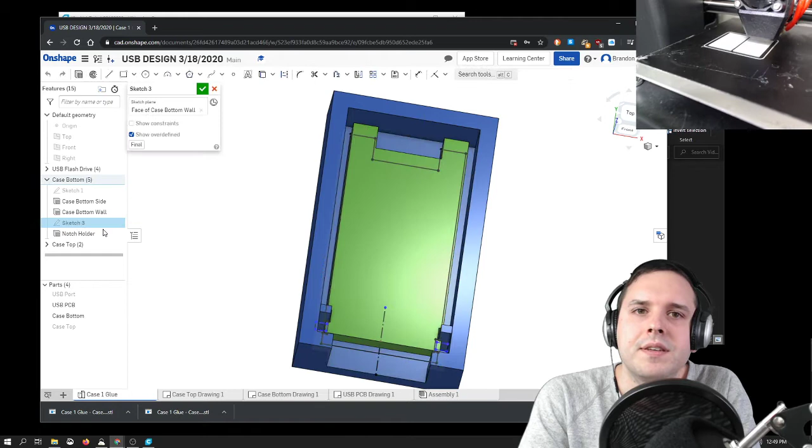Now the biggest thing we have to do at this point is make a drawing of the case bottom. I did that here, and then I printed it out and did a self-check on the printer. Because we're not in actual school anymore, I will do this, but this is what you're going to be handing in on Haiku. And the way you make a drawing, again, is you click on the part you want to make a drawing of, right-click or 2-finger click on the touchpad. You can do create drawing of case bottom, make it 4 views, size A is correct, millimeters is great. I'm not going to make it again, but essentially it'll make this.

Now for the top of my case, the other half of my case, just to keep it simple, all I made was a rectangle that I'm going to glue on there. Case top, that's on there, we're good to go. After you got those 2, you can export. Make sure your units are millimeter, your STL, binary, and you want to export all the case parts that you want me to print, upload them to Haiku. And you're good to go.

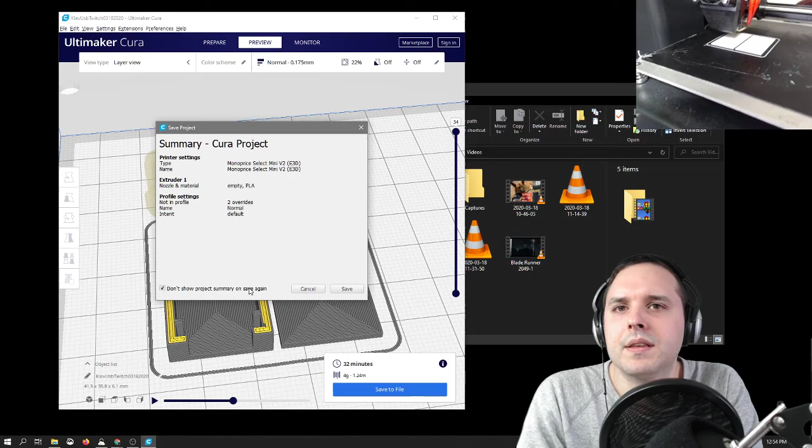Let's head back to CAD. Alright. I don't care about this. Hopefully this saves. Are you actually gonna save? Okay, there we go. Clear build plate, and then... You're fine. I'm gonna start getting yours set up. Thanks for stopping by. See ya.

Alright, so let's see. Download. Alright, let's go into the shark. And let's export that. STL. Now we got that. Oh, just like a little bit too big. Let's see. Can I rotate? Oy. How is that not working?

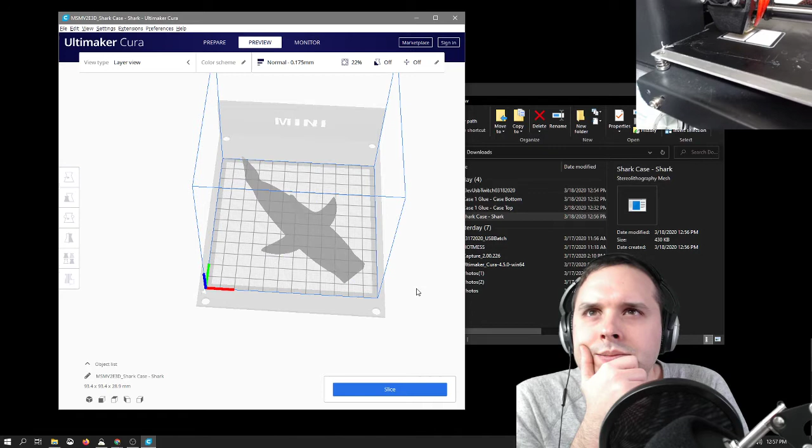Is that out of the bounds? That doesn't make sense. Oh, I'm in preview. Prepare. There we go. Let's actually undo a couple times. Alright, yeah, that doesn't fit. Let's rotate this. Now I'm curious to see how this looks. Should still be on the same setting as last time. In terms of concentric, that might look real weird. Yeah, I don't know if I like that. And pattern just looks strange. Let's see what else we can do. Let's make this bigger.

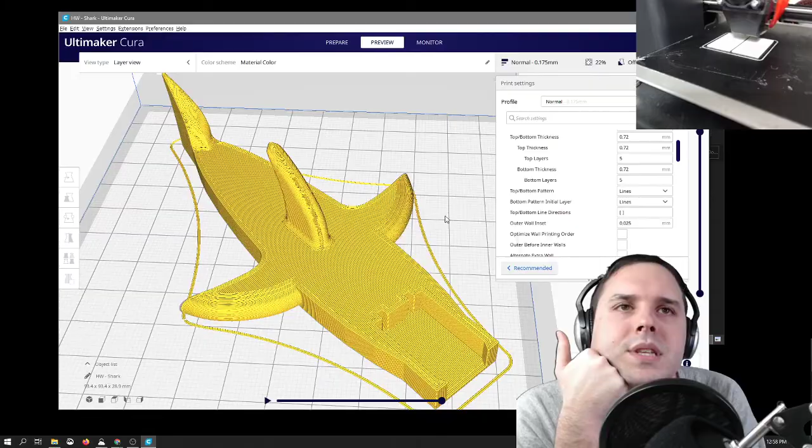Oh yeah, we already pre-printed that at school, so we hacked it apart and printed just a smaller piece of it. Hopefully the tolerance change between my printer and the Lulzbots is fine. It should be cool because mine prints generally a little bit more detailed, a little bit better. That could not be good for us, but should be good for us. Man, I'm curious what this looks like on the stream. I have it open in the background somewhere.

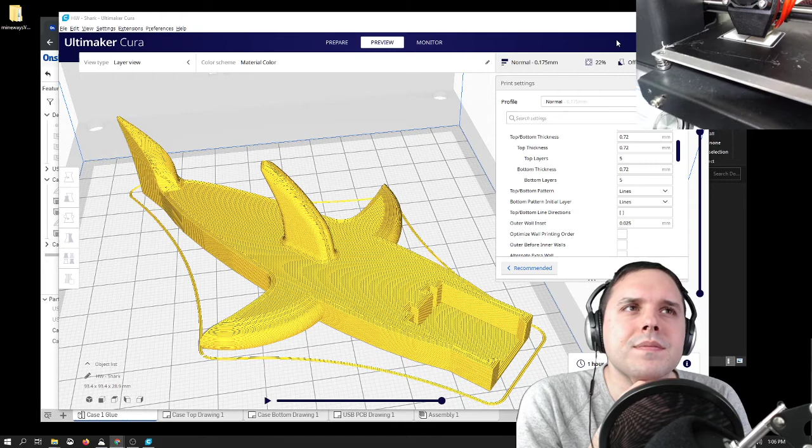That sucks. Alright, Mineways. Oof. Okay, more info. We're gonna run it anyways. Okay, so I can set it up later. No, I'm not opening up the server. What I could do, I would have to ask permission. I could probably do it some way. I'll ask. Because that would be really cool, but the bigger issue is not every student has Minecraft, right? So it's not something every student could work on. That would be hilarious. A free Minecraft account. We should email petition Minecraft. Every student gets a Minecraft account. Alright.

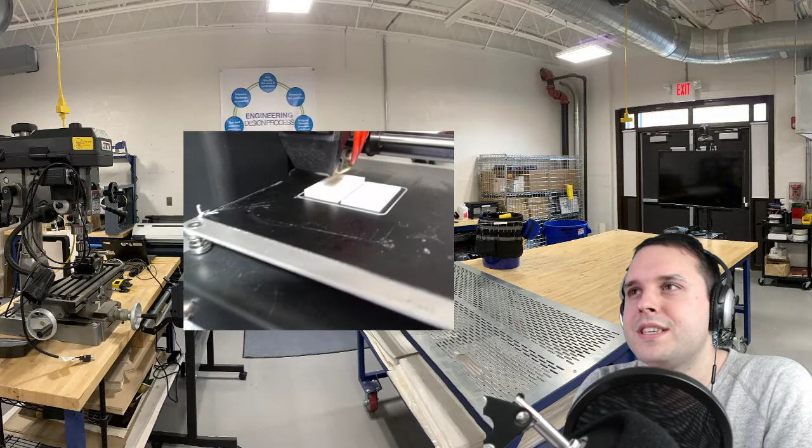I'm gonna switch the camera so it shows a couple things going on at the same time. I think they have some Ed puzzles or something. 3D printer coming at you live from E111? Yeah. Whoops. Or printing upside down. The mill. All hail the 3D printer.

Looks like we're about 90% for the print. And then I think once this print's done, and once I give it a good old check, we're gonna call it a day. I gotta check my email. So I got a bunch of emails that I still need to check. I'm just checking my emails. I still think.

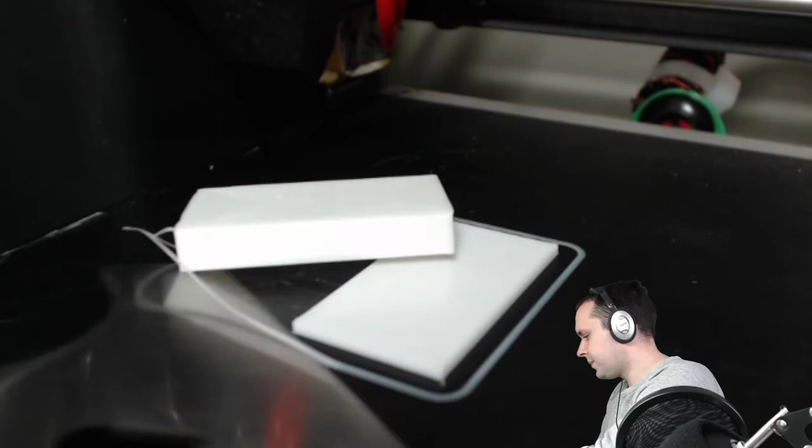Aha! The print is done. Alright, so let's just go full on 3D printing. Let me clear some of my desk space. Get my little paint spatula. Oh, that piece is gone. It went for a trip, and I don't know if I'm gonna get it. I'll be right back. I gotta go look for it. Oh, not too bad. Found it. Alright, let's take a look. Desk. Get my headphones back on, turn off the good old printer because we don't need it right now.

What I should do is figure out a way to get this camera closer. It's kind of annoying. Yeah, I could move it. Problem is I can't tell if it's focused all that well. It's kind of hard to see stuff. So we're looking at it from above. White balance is weird. If I turn off that light, does that help? How about this light? That light doesn't help. If I change the color of the light, oh, if I turn that down. What I need is like a shade. Kind of hard to get in here. It's so bright.